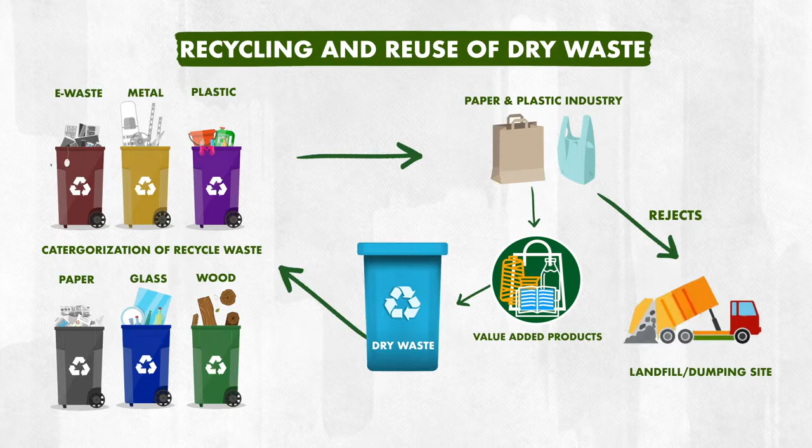Wet waste is biodegradable or organic waste, which mainly comprises kitchen waste. This can be converted into rich manure through the process of composting or through biomethanation.

Domestic hazardous waste includes sanitary napkins, diapers, toiletries, insecticides, etc. Then there is the more complex electronic waste, which should not be thrown into a dustbin and must be sold to organizations providing services related to extended producer responsibility.

For these e-wastes, new mandates were announced in 2016, which focused on ensuring that if such wastes were found to be mixed with municipal solid waste or pertaining to orphan products, then it must be properly segregated, collected, and channelized to authorized dismantler or recycler.

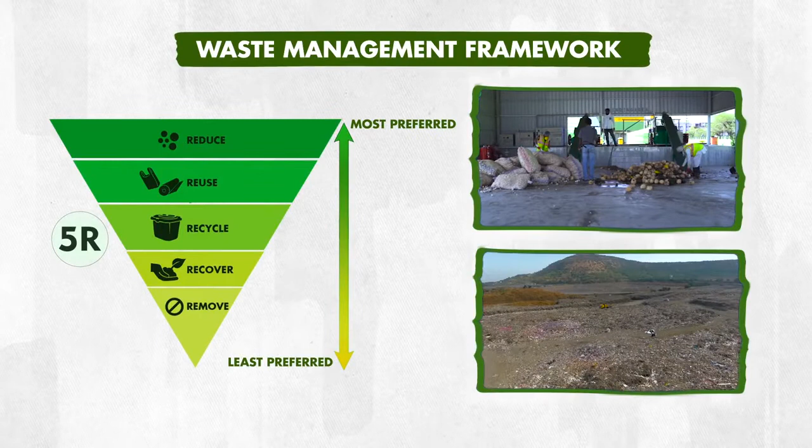The waste management framework follows a hierarchical approach based on the principle of 5 R's, which is reduce, reuse, recycle, recover, and remove. In this, reduction of waste and its sustainability is preferred the most, and its removal and disposal at sanitary landfill is the least preferred.

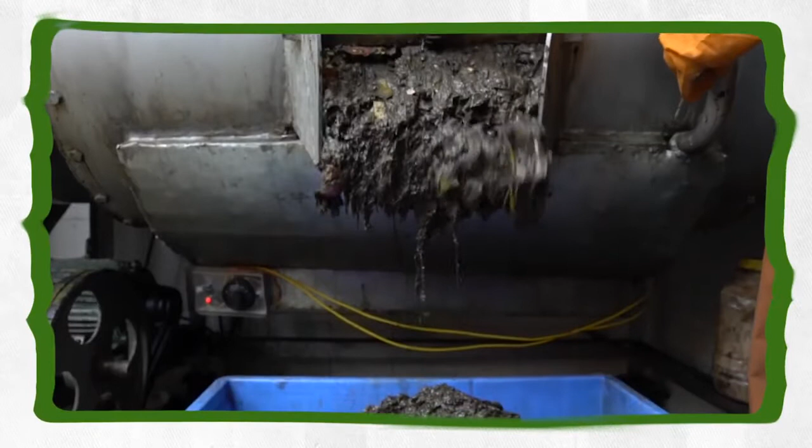The main aim of every municipality is to close the loop of waste management and promote recycling of waste. So what are the basic steps of waste management? A bird's eye view of the waste management value chain involves 6 essential steps, namely waste generation, segregation, collection, transportation, processing, and scientific disposal.

Waste is generated when a material which is no longer in use has served its purpose and is discarded. This can be at the household or generated in bulk in apartment complexes, malls, offices, hospitals, hotels, universities, and like places.

The next step involves segregation of waste. Before any material can be recycled, it needs to be separated and sorted. Separation can be accomplished at source of the waste or at a central processing facility. However, segregation is most effective if done at source.

Previously, citizens were unaware about the benefits of source segregation, but with the introduction of the new SWM rules, many cities have now adopted this practice.

The next steps are collection and transportation of waste, which is done door to door or at collection points with the help of small mechanized and non-mechanized vehicles. Further, it is transported to processing sites or disposal sites via larger covered vehicles. To improve its monitoring, the garbage collection vehicles have a GPS tracking system which helps monitor the location of the vehicle at all times.

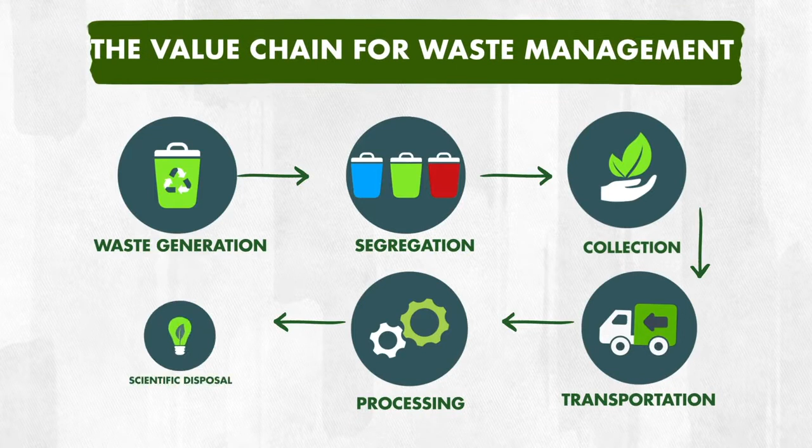Now that we know the different kinds of waste and the steps involved in its management, we must acknowledge that there is an intrinsic habit amongst citizens to use one bin for all garbage. This ends up mixing dry, wet, recyclable, domestic hazardous waste and even e-waste in one bin. Hence, one of the biggest concerns in urban India has been the segregation of solid waste.

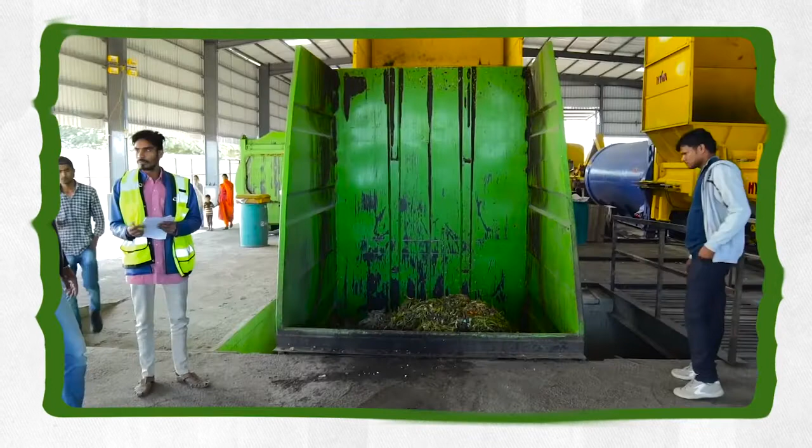Several studies have shown that India primarily generates a little over 50% of wet waste compared to other types of waste. This biodegradable waste has the potential of generating high revenue. To this end, the government is aiming to promote and enforce source segregation for effective waste management and to reduce the pressure on landfills. Mixed waste leads to higher residues, adding a financial burden to the waste management value chain.

Let us now understand the various methods of waste processing.

A constructive way to promote source segregation has been encouraging home composting. If individual households or apartment complexes make it a habit to segregate and compost wet waste, it will offload a huge task from the ULBs, and in return, they'll get a high-quality compost which can be used as manure for the gardens.

Availability of various technologies has made this possible, but we still need to know how to do composting at home. It is a fairly simple process. Choose and invest in one of the various available technologies, install it in a dedicated space in your house, segregate your waste, initiate composting processes using a suitable accelerator, and within a stipulated time, get the final compost.

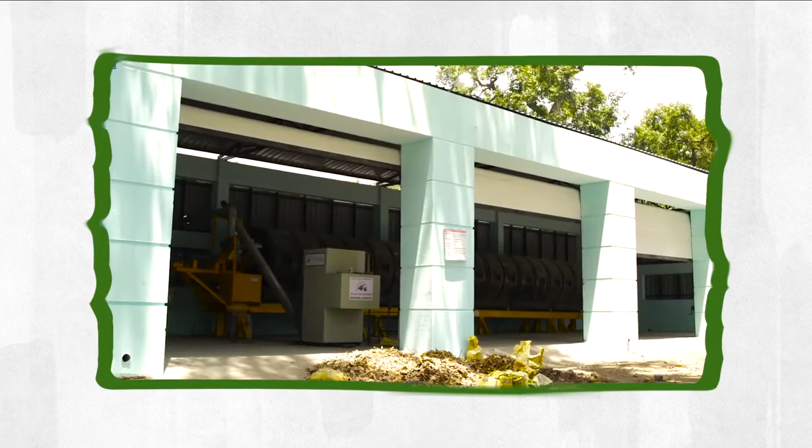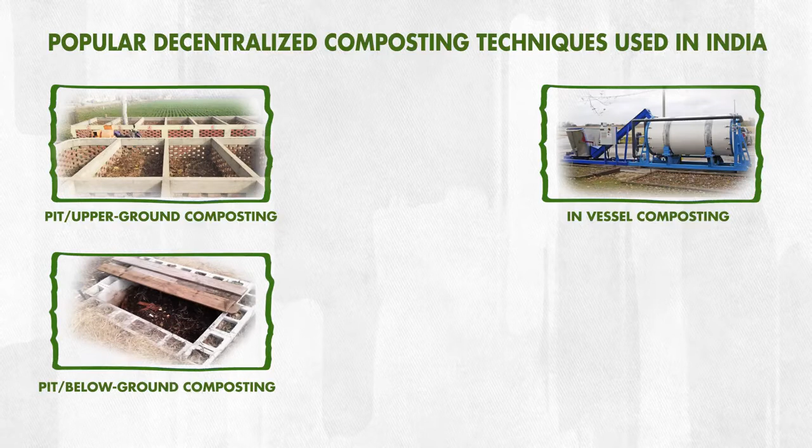Many large establishments such as apartment complexes, hotels, shopping malls, institutes, and offices focus on decentralized methods of composting. A variety of technologies allow bulk waste composting for communities to compost within their premises.

For the success of the unit level and decentralized level of composting, it is important to generate awareness amongst the stakeholders and conduct behavior change activities through effective IEC programs and capacity building. Also, ULBs need to adopt mechanisms to enforce, supervise, and monitor the system by engaging civil society organizations. A decentralized approach to waste processing reduces the cost of transportation and the dependency on dumping yards.

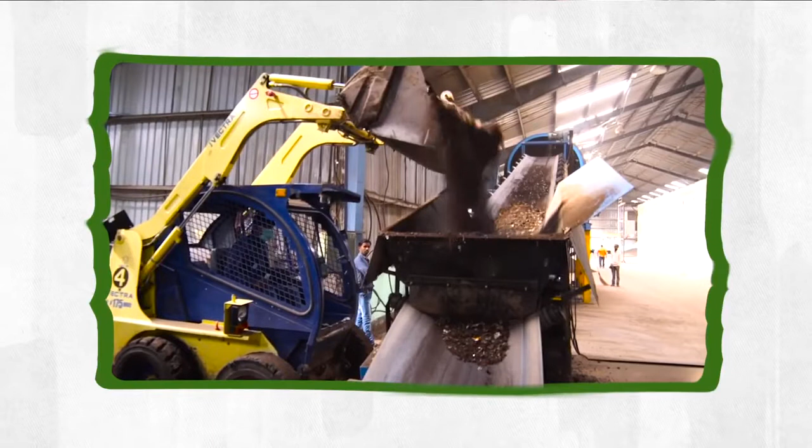However, for newly developed cities, the decentralized method is being encouraged. A few bigger cities still continue with the practice of centralized composting due to the large volume of waste generated. In such cases, the centralized method is cost-effective, requiring less manpower, machinery, and transportation cost.

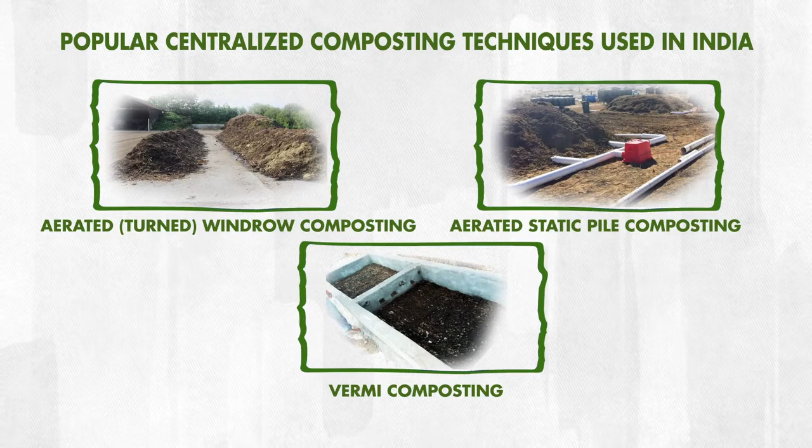Another decentralized method of processing is biomethanation for the processing of wet waste. Energy from waste is the crucial element of biodegradable waste. The installation of waste to compost and biomethanation plants helps reduce the load on landfill sites. Let us see how biomethanation works.

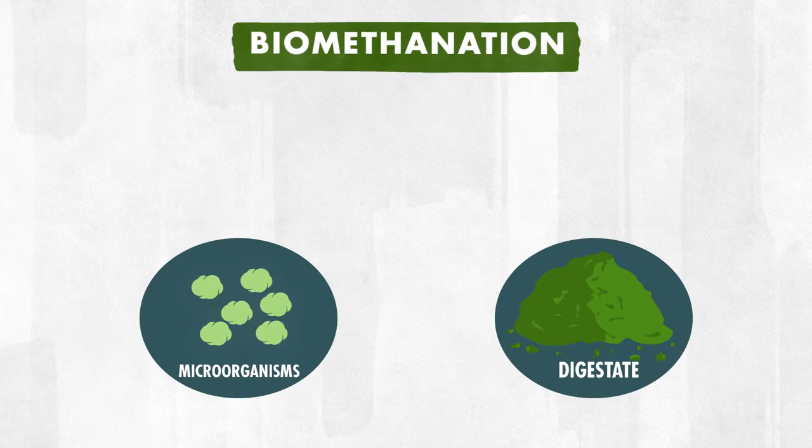Biomethanation is the anaerobic digestion of biodegradable waste which is treated in an enclosed space under controlled conditions of temperature, moisture, pH, etc. In the absence of oxygen, microorganisms break down the organic matter into a stable residue and generate a methane-rich biogas in the process. This biogas can be used as a source of renewable energy to produce electricity, and the solid residue can be utilized as manure.

Before we begin with the dry waste processing methods, let us first understand how dry waste is recovered. Once the wet and dry waste is segregated, the dry waste is stored in material recovery facility and the dry waste collection centers. Here, once again, sorting takes place.

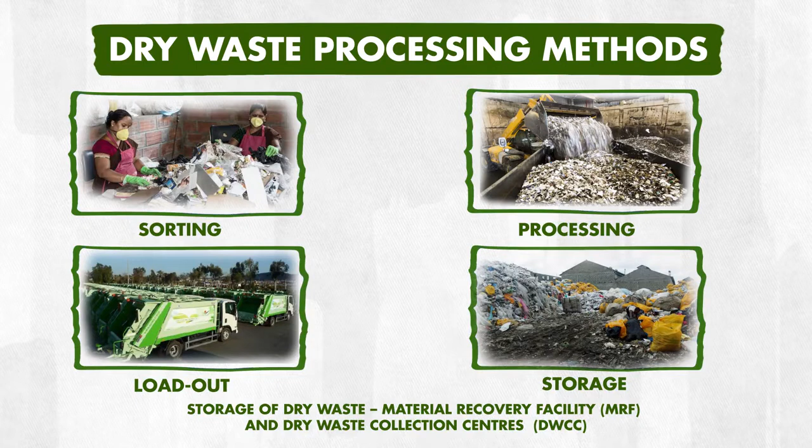The recyclable waste from MRF are sold to authorized recyclers. The ones fit for processing are transferred to their respective processing plants. The main function of the MRF is to maximize the quantity of recyclables while producing materials that will generate the highest possible revenue in the market.

Construction and demolition waste is a new inclusion post the guidelines announced in 2016. These are residues of constructional, demolition, and restructuring activities of civil structures. Although the exact data is not known, roughly India produces 100 million tons of construction, demolition, and excavation waste material annually. Recycling of C&D waste can help reverse its detrimental effects on the environment and cut cost in producing building materials.

Within solid waste management domain, bulk waste generators play a significant role. As per Solid Waste Management Rules 2016, the bulk waste generator includes all gated communities and institutions within an area of more than 5,000 square meters, such as residential areas, commercial establishments, government and public sector or private bodies, social infrastructure having an average waste generation rate of more than 100 kilos per day.

Bulk waste generators need to ensure that their waste is managed and treated within their premises. Urban local bodies play a crucial role in monitoring the implementation of guidelines and bylaws set out in the SWM rules for 2016 for bulk waste generators.

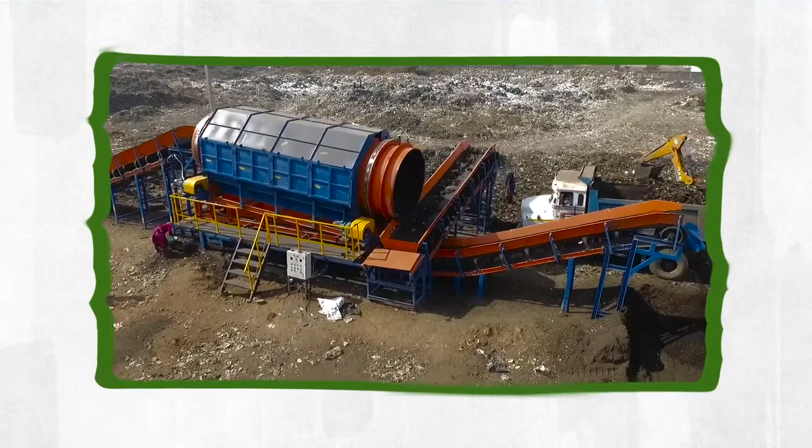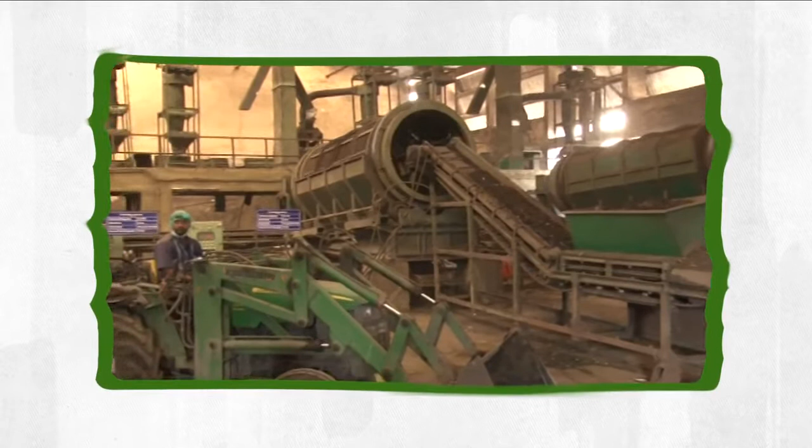But what happens when a city does not have the space to install so many processing units? Many cities have adopted the concept of an integrated solid waste management facility, or ISWM. This gave rise to the need for a comprehensive and effective waste prevention, recycling, composting, and disposal technology to manage municipal solid waste while being economically viable and environment friendly.

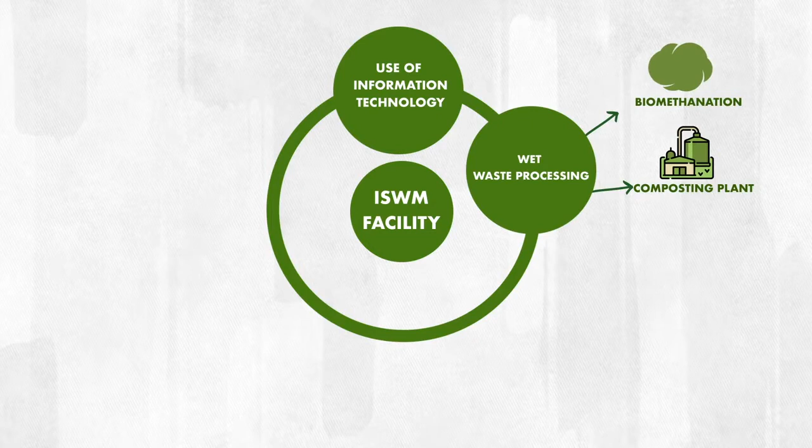Integrated Solid Waste Management Facility is a centralized processing facility where segregated waste can be directly brought and treated as per the type of waste. The ISWM systems are designed to suit the local needs and conditions of a city.

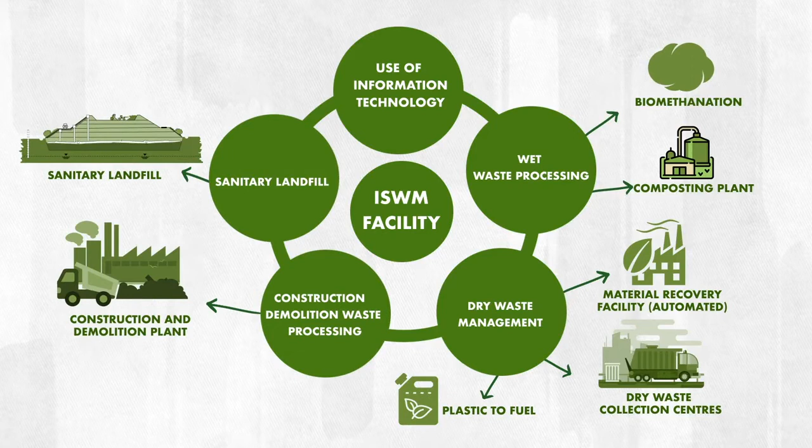Solid and liquid resource management, or SLRM, is a community-based model which suits the needs of a specific community and is also managed by them through SHGs. Let us see the steps in which SLRM functions. SLRM is beneficial due to its integration of source segregation, promotion of community participation, and implementation of user-friendly technologies. In addition, it provides the opportunity to generate livelihoods, especially for women.

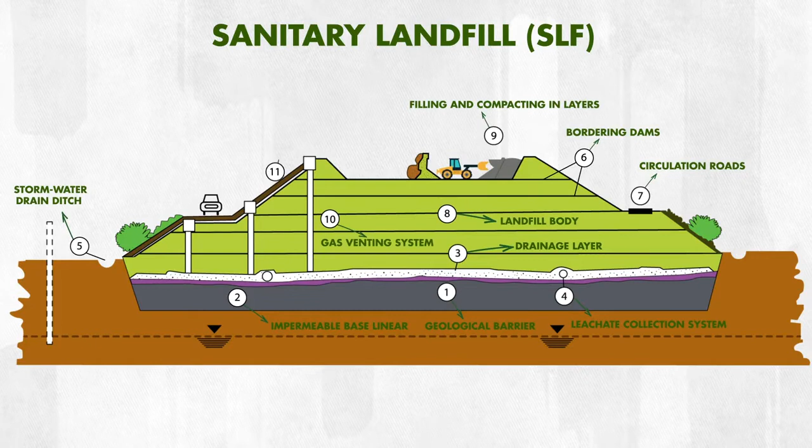The last step of processing waste is isolation and disposal of solid waste residue and inert waste in a scientifically designed and controlled facility, which ensures that the waste does not seep into the groundwater, nor does it hamper the environment.

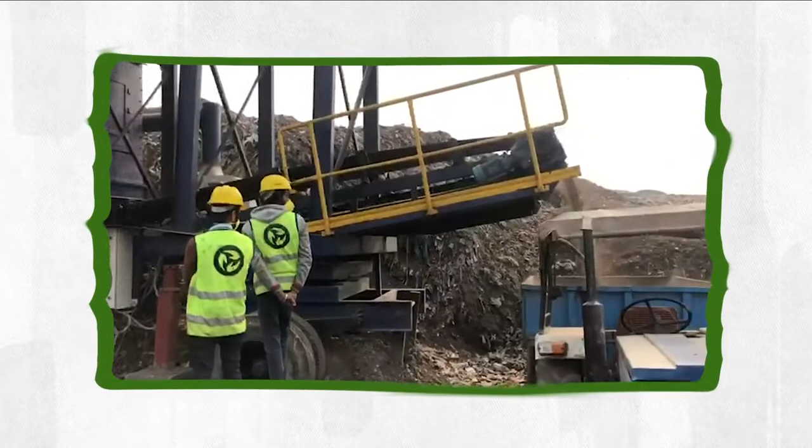But what happens to the existing dump yards, which were not scientifically designed? Corrective actions for dump yards which have been existing for a long time are being done across the nation. They are treated in a process known as bioremediation. Let us see how bioremediation takes place.

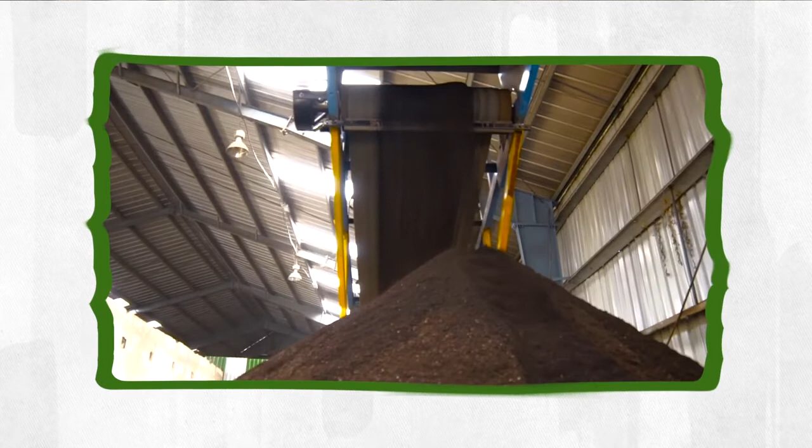The first step is to excavate a dump, loosen it, and make windrows so that leachate can be dried off naturally. Composting biocultures are then added for decomposition. After completely drying, waste is screened through sieves of different sizes to obtain refuse-derived fuel, or RDF, and compost. The obtained compost is ready for use and the RDF is sent to cement factories.

Through this process, many cities in India have converted their dump sites into recreational spaces.

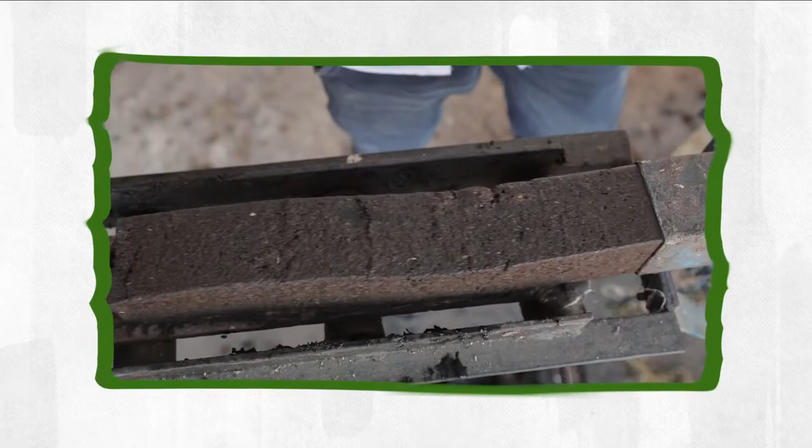Innovation is the latest buzzword everywhere, and it has found its place in waste management as well. Across various cities of India, ULBs have come up with innovative methods for waste management in order to reduce costs, cater to local needs, and find revenue-generating solutions, highlighting the concept of waste to wealth. Let us look at a few innovative waste management methods prevailing in India.

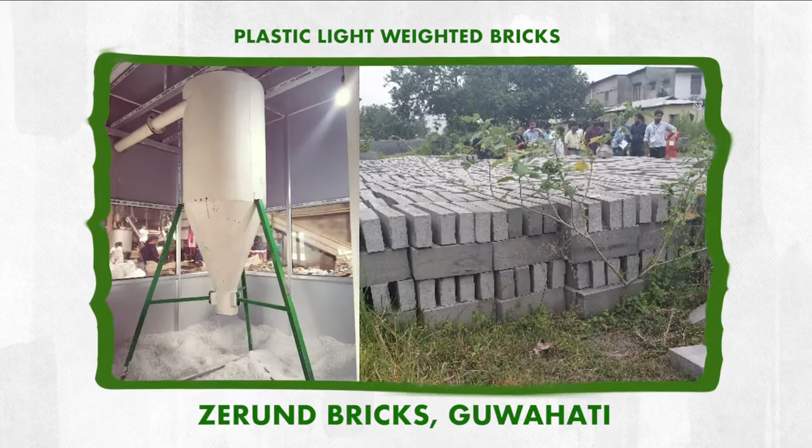The waste management value chain is incomplete without mentioning fecal sludge and septage management, or FSSM. Fecal sludge or septage is the slurry that contains both solid and liquid waste accumulated in septic tanks. It results from the collection, storage, or treatment of a combination of excreta and black water.

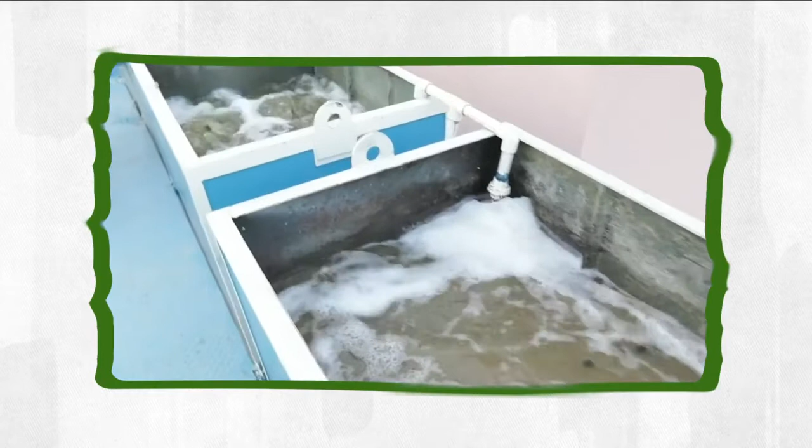FSSM is a systematic approach towards building a sustainable and environmentally safe infrastructure for all components across the sanitation value chain of non-networked households. FSSM involves collection, treatment, safe disposal, and reuse of treated septage. To understand how FSSM is done, let us see the steps involved.

The first step is collection, which is the safe removal of septage from on-site sanitation systems. In urban areas, different situations prevail that facilitate or restrict the collection of septage from septic tanks. Generally, the services are made available on a scheduled basis or a call for service basis.

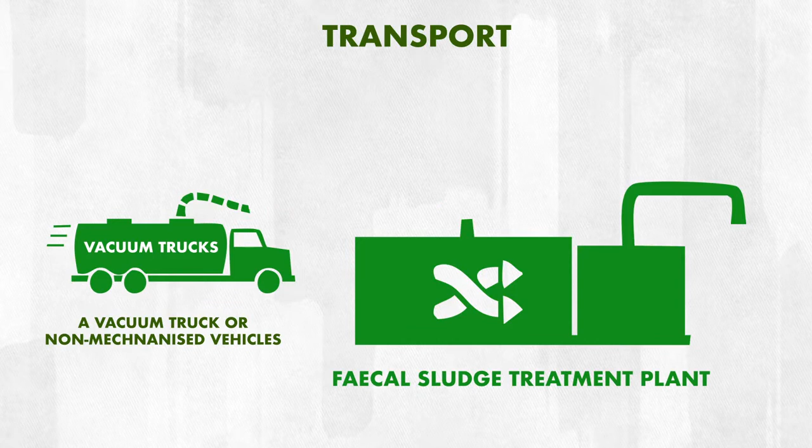The collected fecal sludge is then transported to treatment plants using a vacuum truck or a non-mechanized vehicle and a small tank. The collected fecal matter is dumped in vacant land or water bodies. The government is enforcing new laws to ensure that this collected fecal matter is treated properly and is reused for other purposes. It is then treated at a dedicated fecal sludge treatment plant.

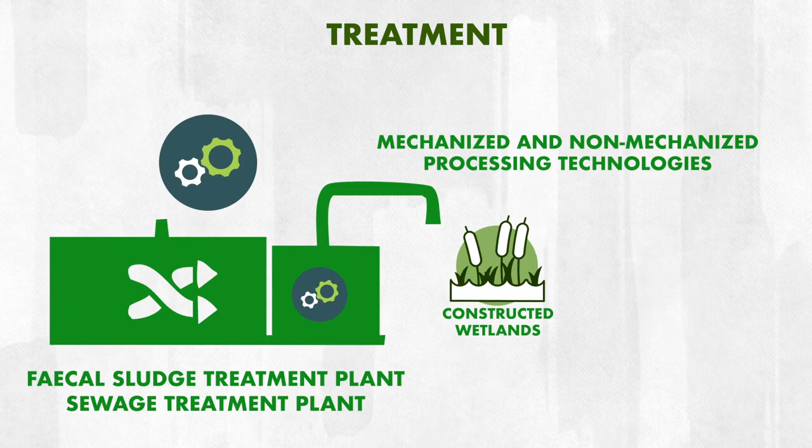In a few places, it is co-treated in a sewage treatment plant. A variety of mechanized and non-mechanized processing technologies are used, including constructed wetlands, anaerobic digestion, and waste stabilization ponds. In the end, septage is also reused as an energy resource in a few places. The manure produced after composting can be used as a soil conditioner, and treated liquid waste is reused in gardens and parks.

This completes the cycle of waste management value chain. Now we know what happens to waste once we throw it in the bin, and what a useful resource waste can be, and why waste matters in our day-to-day lives.